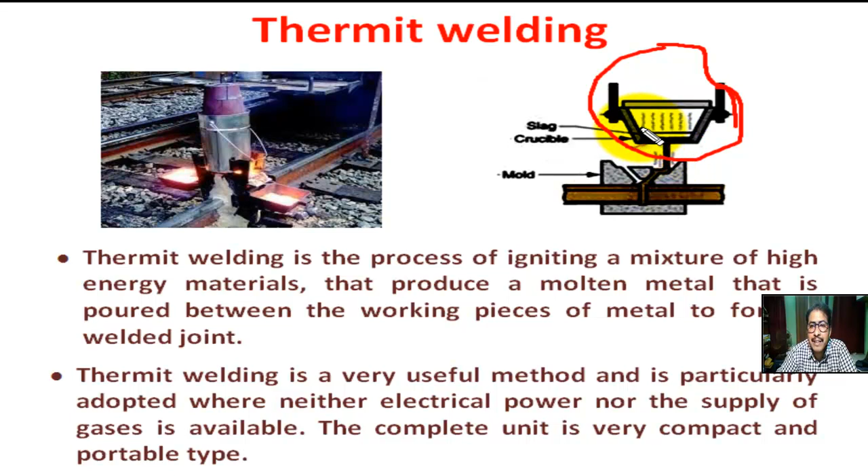Okay. This is the container where powder aluminum and iron oxide are placed. This container is called crucible. This is made of metal or ceramic. Okay.

Now this mixture is ignited by heating to about 1550 degrees centigrade; usually barium peroxide powder is used for igniting the thermite mixture. Okay, and a chemical reaction takes place due to which aluminum is converted into aluminum oxide and iron. Iron is melted.

The reaction is 3Fe3O4 plus 8Al, aluminum, equal to 4Al2O3, this is aluminum oxide, plus 9Fe, iron, plus heat. This is iron oxide. This is aluminum. This is aluminum oxide. This is iron and heat. This reaction is called thermite reaction. Okay.

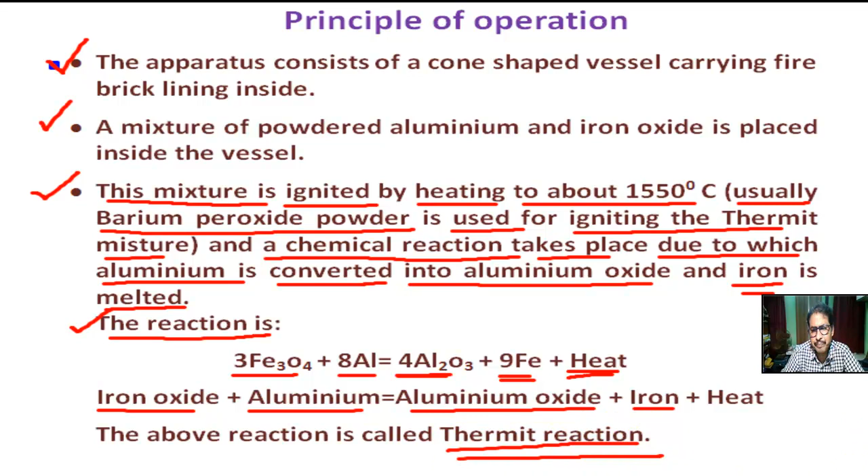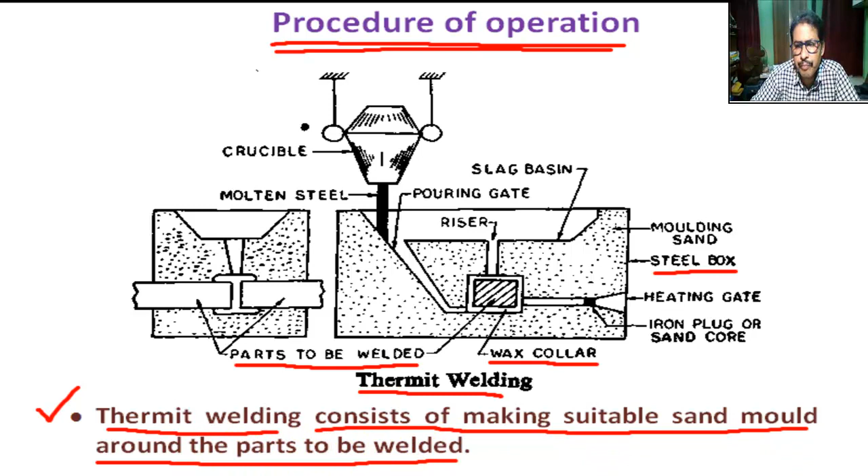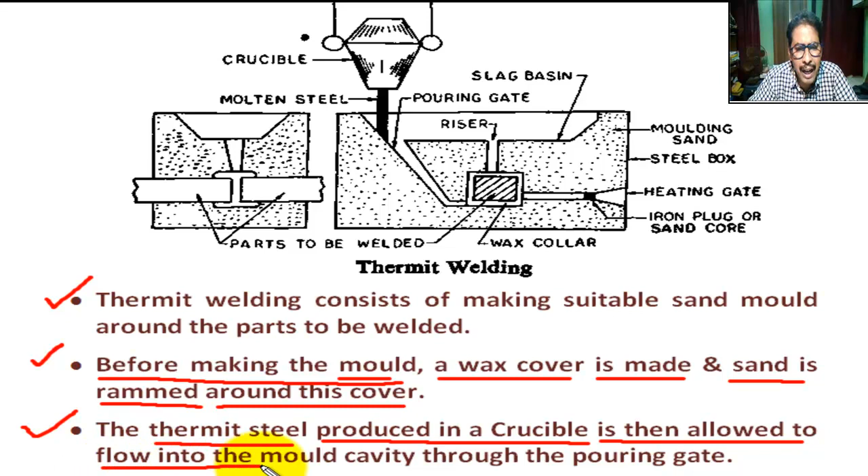Here thermite welding consists of making a suitable sand mold around the parts to be welded. Now, before making the mold, a wax cover is made around the joint portion and sand is rammed around this cover. The thermit steel, the molten metal, produced in a crucible, this is the crucible, is then allowed to flow into the mold cavity through this passage, through the pouring gate. This is the pouring gate. Okay.

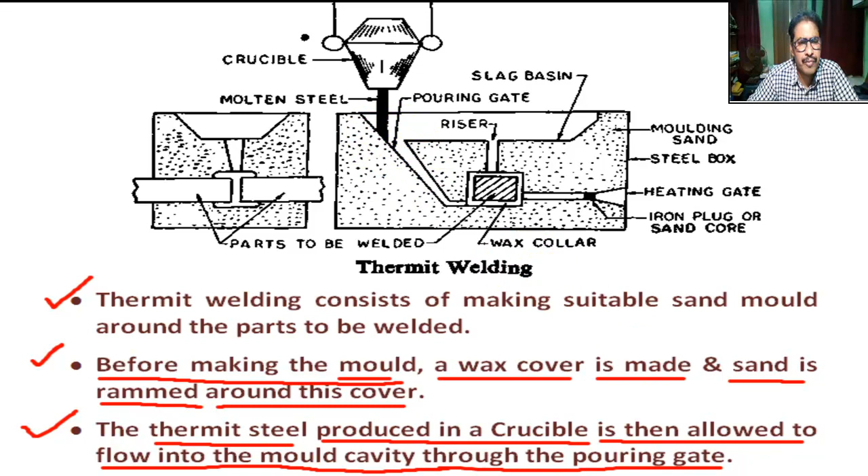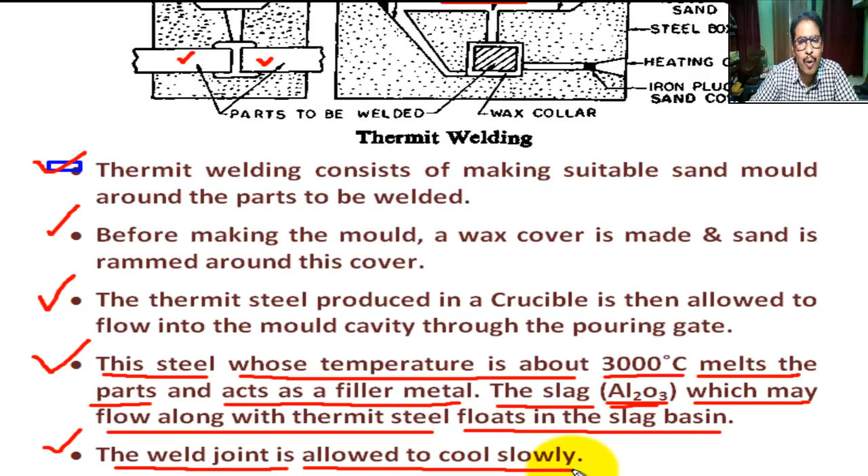Now this steel, whose temperature is about 3000 degrees centigrade, melts the parent metal and acts as a filler metal. The slag, Al2O3, aluminum oxide, which may flow along with the thermit steel, floats in the slag basin, in the upper portion of the riser, here you see it floats. Next, the weld joint is allowed to cool slowly. Okay.

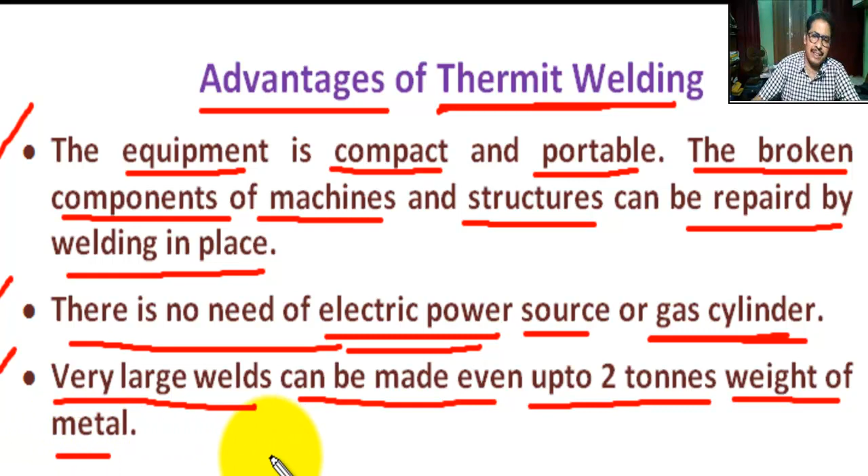Now, what are the advantages of thermit welding? The equipment is compact and portable. The broken components of machines and structures can be repaired by welding in place. In place means on the spot. There is no need of an electric power source or gas cylinder for gas welding. Very large welds can be made, even up to 2 tons weight of metal can be welded. Okay.

Now, application of thermit welding. Railway lines, crankshafts, connecting rods and other large sections are welded by thermit welding. Repairing of teeth of gears, pinions, sprockets of driving wheels. Next, welding of pipes, cables, shafts, etc. can be done by thermit welding. Broken frames of machines can be welded by thermit welding.